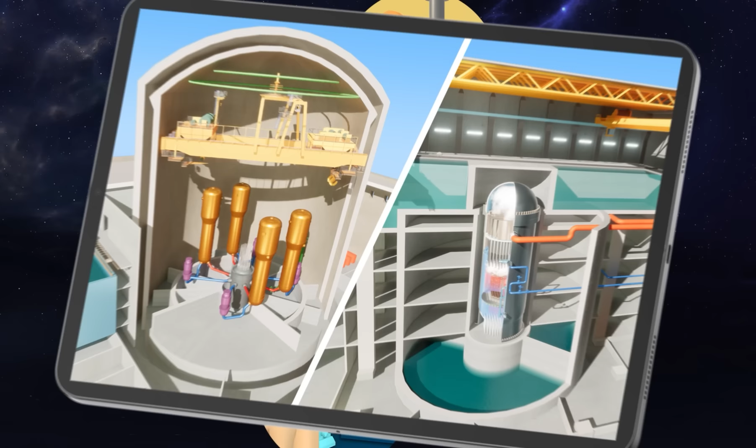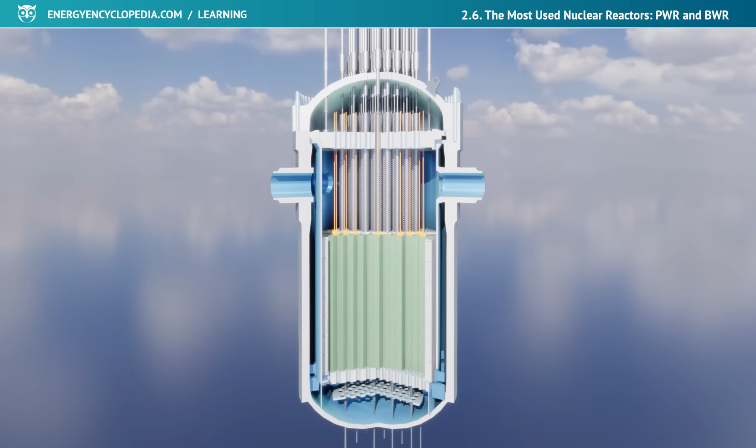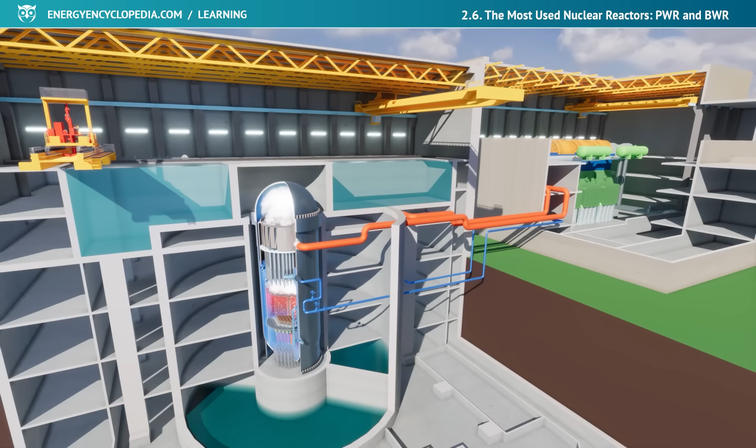During the development of nuclear technologies, various types and designs of nuclear reactors were created, differing primarily in the moderator and the coolant used. The types that used ordinary water for these purposes, the pressurized water reactor (PWR) and the boiling water reactor (BWR), eventually achieved the widest use. Their names already sufficiently describe the main differences between them.

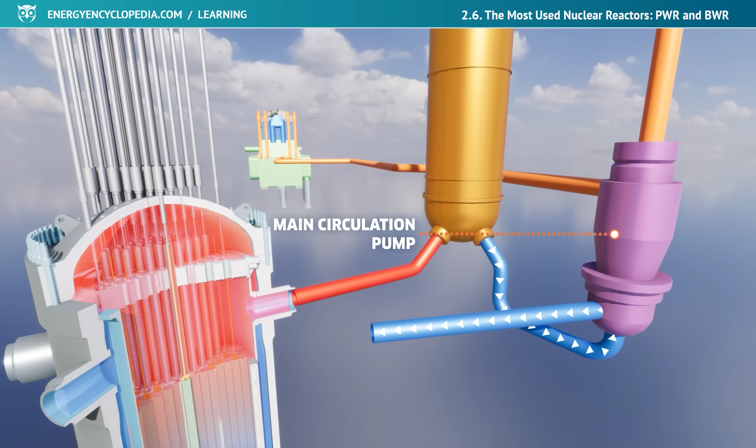A pressurized water reactor uses water under high pressure, circulating only within the primary circuit to remove heat from the core. Whereas in a boiling reactor, heated water is boiled at a lower pressure and the resulting steam is brought directly into the turbine.

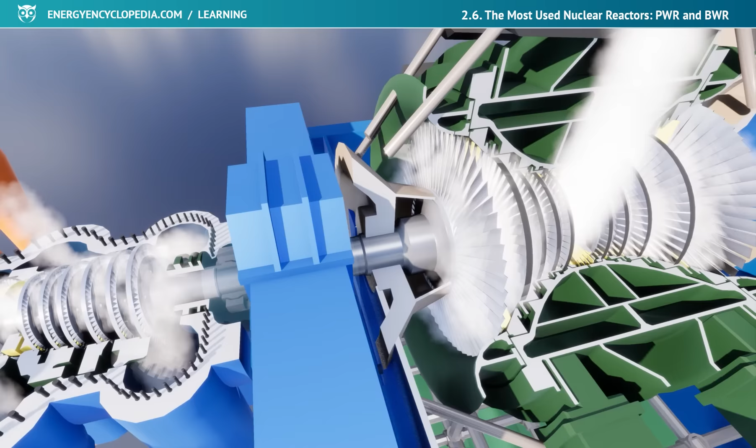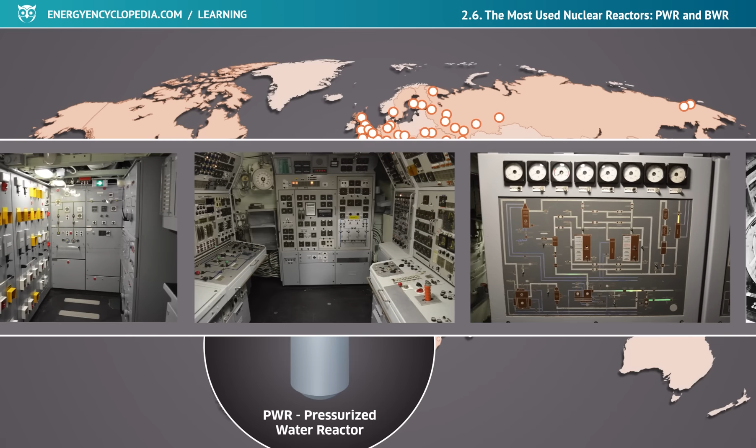More than half of all operating power reactors in the world are pressurized water reactors. Their design was developed in the USA from proven nuclear sources for the US Navy and later adopted and modified in Russia. The Russian modification of the pressurized water reactor is denoted by the abbreviation VVER, based on the full Russian name Vodo-Vodjanoj Energetičeskij Reaktor.

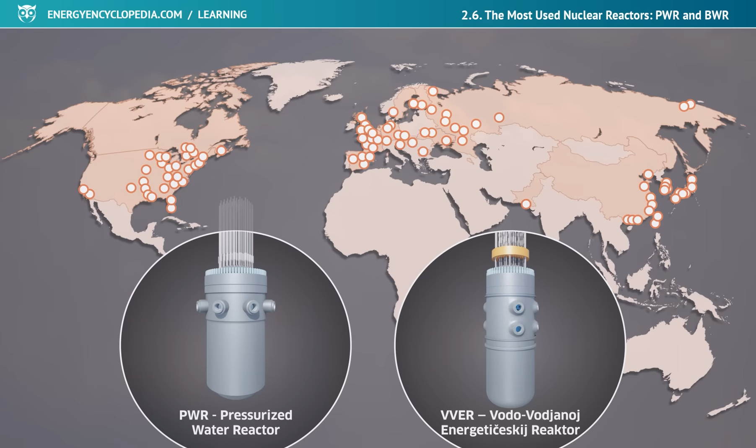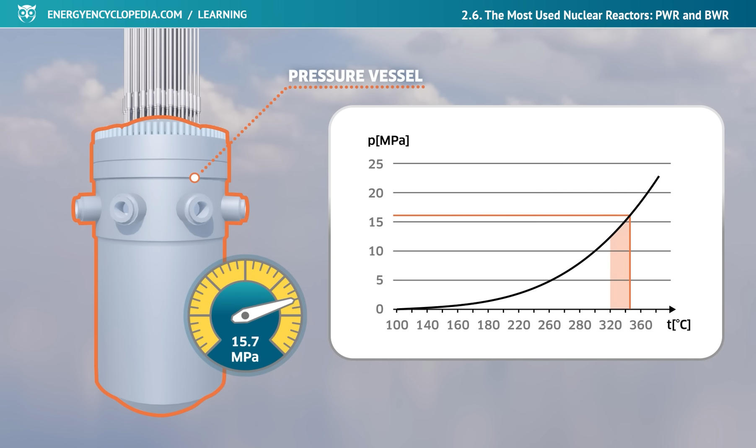The main task of pressurized water reactors is to heat the circulating water to the highest possible temperature. The achievable water temperature is directly dependent on its pressure, and therefore the core must be placed in a thick-walled pressure vessel, withstanding approximately 150 times atmospheric pressure. At this pressure, with a certain safety margin until boiling, the exit temperature of the water from the reactor is around 320 degrees Celsius.

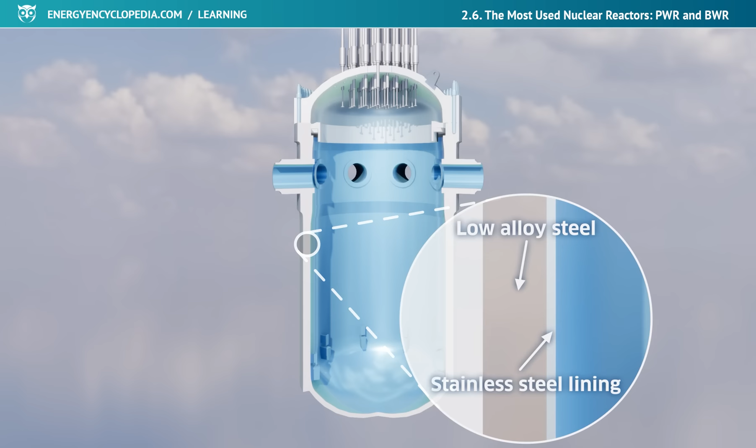The pressurized water reactor vessel is made of low alloy steel, but the inner surface is provided with a layer of stainless steel lining. The separable part of the container is the upper lid, through which the control rod and the outlet for measurements of the internal reactor go. During a refueling shutdown, the lid is removed to allow the loader to access the fuel assemblies that need to be replaced.

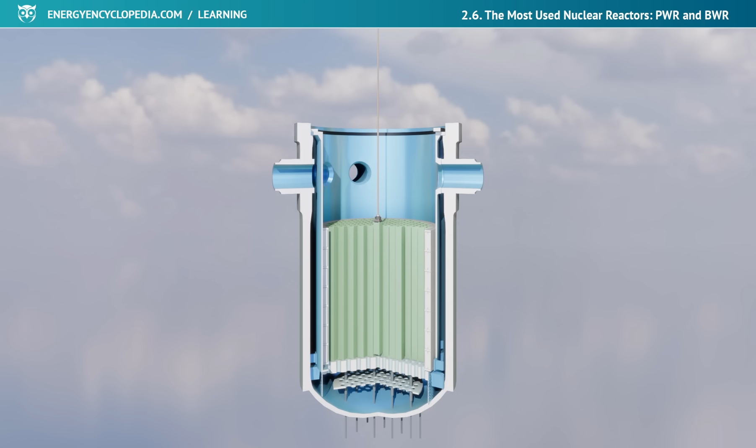Ceramic pellets of uranium oxide enriched to 3.5 to 5% are used most often as fuel in PWR reactors. They are inserted into zirconium fuel rod claddings, which are then assembled into 4-meter-long square or hexagonal fuel assemblies. The core of the reactor, composed of fuel assemblies, has a diameter of 3 meters.

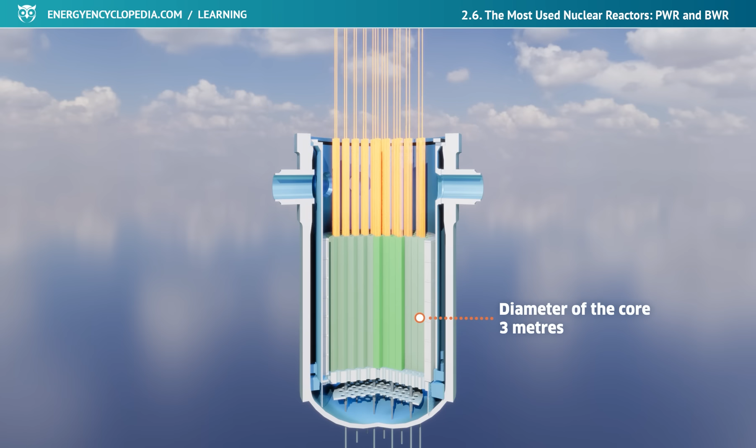Control rods containing boron or cadmium are used for immediate control of reactor power, and boric acid dissolved into the coolant is used for slow control and compensation of excess reactivity.

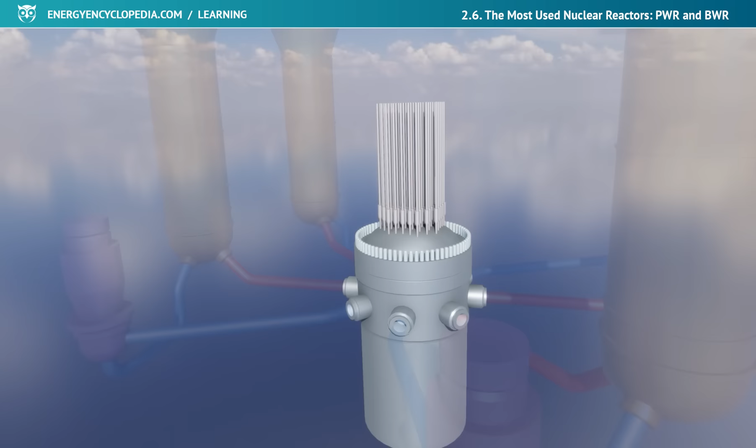The coolant that removes the heat from the reactor, and at the same time the moderator that slows down the neutrons in a PWR, is ordinary light water. After entering the reactor, it flows downwards through the gap between the core and the pressure vessel, where it turns and continues past the fuel rods in upward direction.

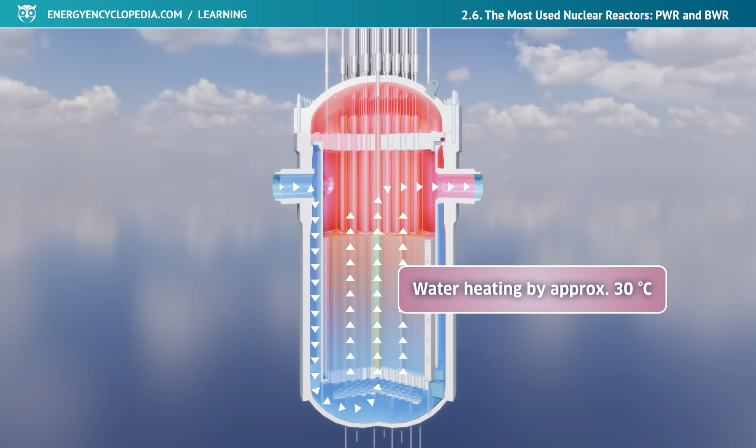Passing through the core, where its moderating properties are also used, the water is heated by approximately 30 degrees Celsius and continues through the primary pipeline to the steam generator, where it transfers its heat to the steam-water mixture of the secondary circuit. After drying, the resulting clean steam is conducted to the turbine through a steam pipe.

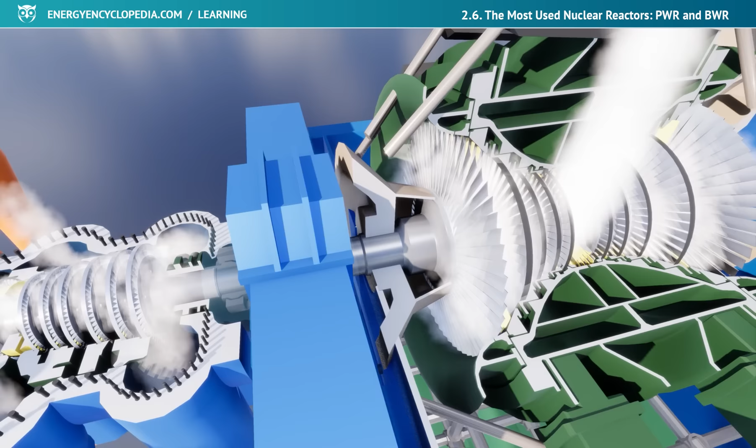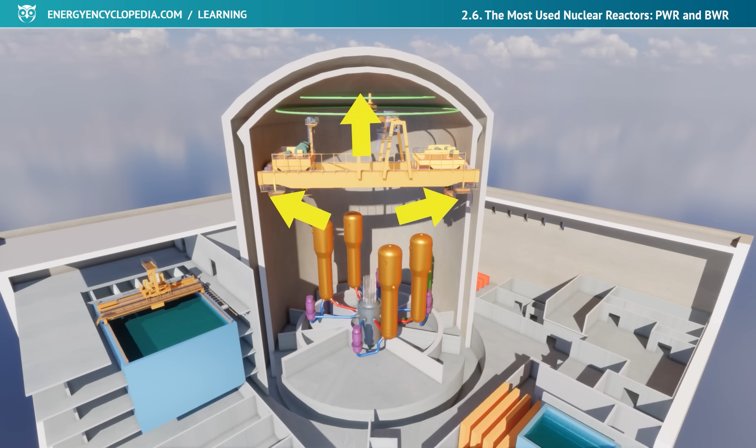The cooled water of the primary circuit is then returned from the steam generator to the reactor using the main circulation pump. For safety reasons, the reactor and all parts of the primary circuit are placed in a protective cover, which fulfills the function of mechanical protection of the reactor against external influences, and at the same time functions as a closed hermetic space to protect against the leakage of dangerous substances into the external environment. During normal operation and in the event of an accident, the massive containment acts as high-quality radiation shielding.

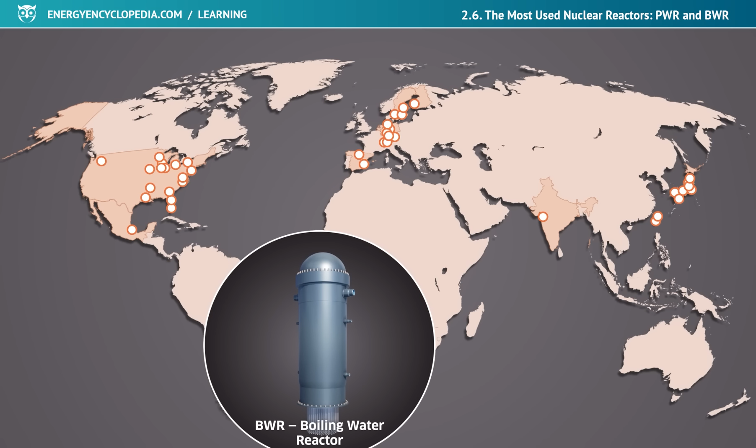The second most common type of nuclear reactor is the boiling, light water-cooled and moderated reactor, known by the abbreviation BWR. Approximately 1 in 5 operating reactors in the world is of this type. The reactor consists of a steel pressure vessel with a core, structurally similar to the PWR core.

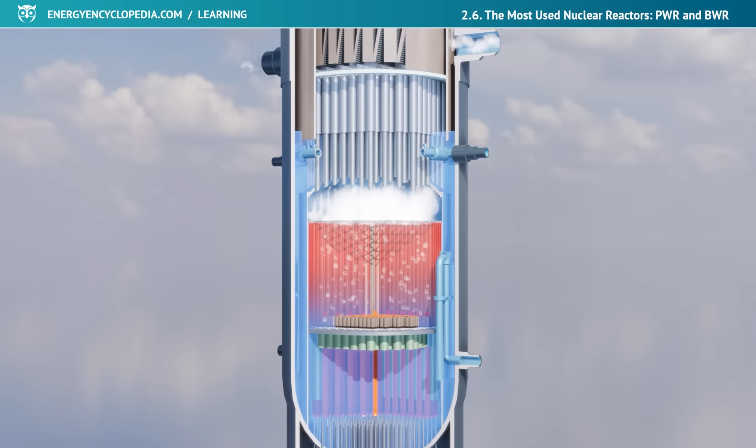However, the steam to drive the turbine is created here directly in the reactor, and some modifications to the design must also correspond to this, enabling, for example, reliable control of reactor output, or steam drying in the upper part of the pressure vessel.

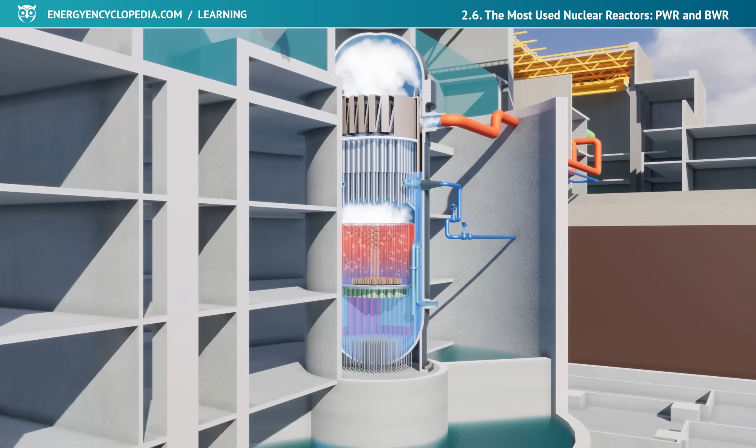In a single-circuit layout of a power plant with a boiling reactor, the reactor itself fulfills the function of a steam generator. The simpler construction of the power plant, with fewer components, is cheaper and easier to control, but on the other hand it brings the potential possibility of radioactivity transfer to the turbine. The controlled area must therefore also include an entire turbine building.

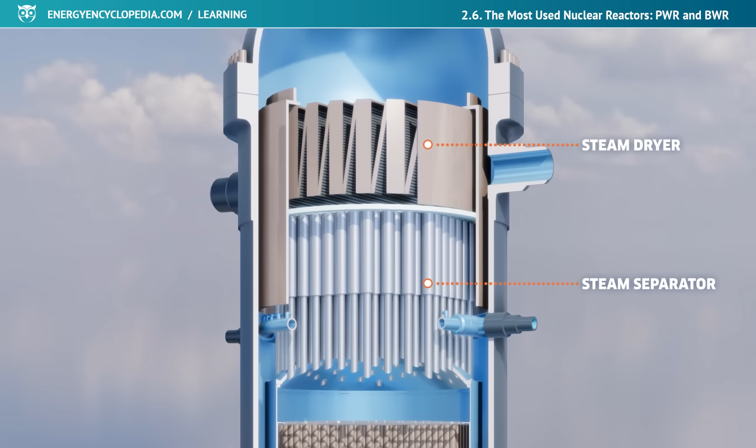Due to the presence of the steam phase in the upper part of the core, and the occupation of the upper space of the pressure vessel by the steam separator and dryer systems, the control and emergency rods are inserted into the reactor from below.

The performance of BWR reactors can be regulated mainly by changing the position of the absorption rods, and by changing the flow rate of the coolant, affecting the content of the steam-water mixture through the core. The bubbles contained in the boiling water reduce its moderating abilities and thereby suppress the ongoing fission reaction.

The fuel is again cylindrical ceramic pellets made of slightly enriched uranium oxide. The pellets are stacked into 14 mm diameter fuel rods, which are assembled into square fuel assemblies approximately 4 meters long. 4 fuel assemblies, among which an absorption rod with a cross-section shaped like a cross moves, form the basic fuel module of the BWR reactors.

The reactor is refueled once a year during shutdown, when the reactor is opened and a quarter to a third of the fuel assemblies are replaced.

Ordinary demineralized water reliably fulfills the function of moderator and coolant at the same time. The BWR reactor operates with a water pressure of approximately 7 megapascals, and its temperature reaches up to 290 degrees Celsius. The presence of steam in the reactor, and the power control by changing the density of the moderator, increase the production of plutonium and thus contribute to more efficient use of the fuel.

The lower pressure and overall lower power density compared to a PWR, in turn, extends the life of the reactor's steel pressure vessel. Last but not least, the advantage of BWR reactors from the point of view of safety is also their large negative temperature coefficient of reactivity.